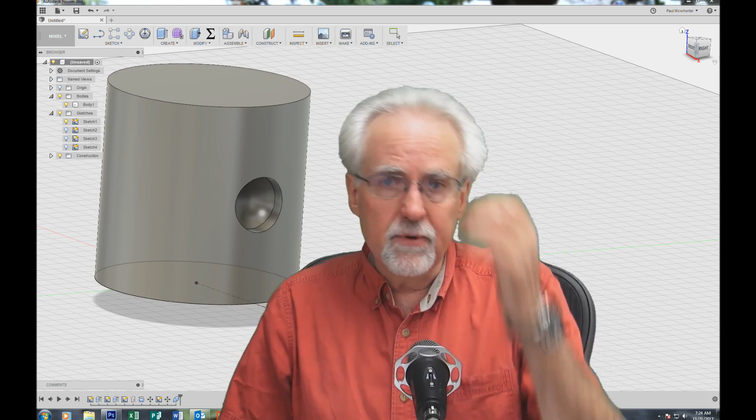We're actually going to have lesson number 13 in this series, and what we're going to look at today is a technique for creating more complicated 3D shapes in Fusion 360, and specifically we're going to be learning how to create a tool.

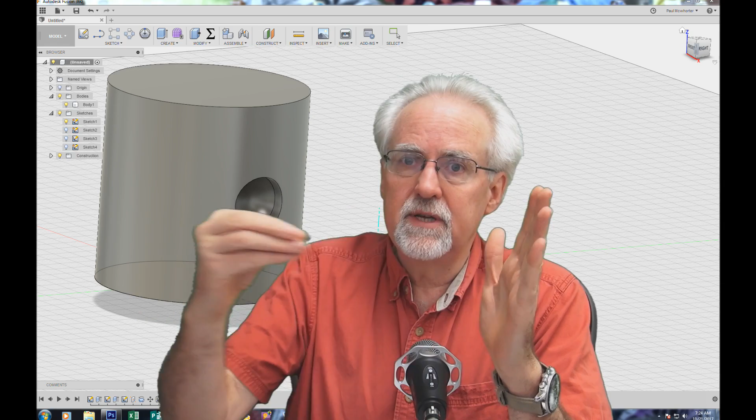A tool is something where you create a mechanical object in Fusion 360 that you use to cut or intersect another three-dimensional object. Now what I need you to do is pour yourself a nice strong cup of coffee, fire up Fusion 360, and get ready to learn some cool stuff.

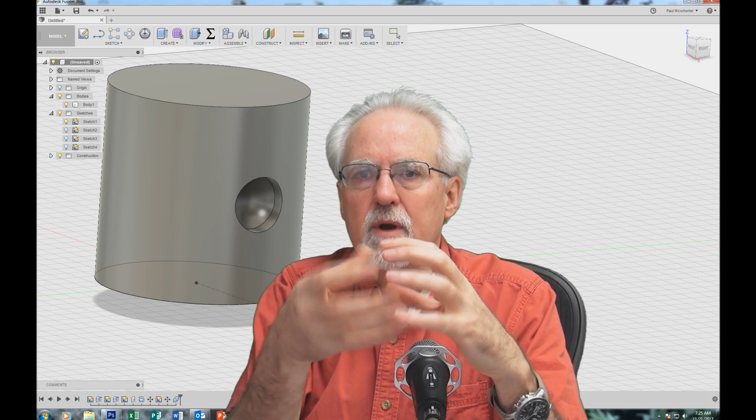Specifically what I am trying to create here is I'm working on a little project where I would like to sort a bag of M&Ms, and so I want to pour a bag of M&Ms in, and then I want to mechanically be able to sort them by color. I'll have a color sensor and then a stepper motor, and it'll all be controlled by an Arduino.

Now the electronics in the sensor part and the stepper motor are pretty straightforward, but the challenge is to be able to go out and get an individual M&M at a time. So what I want is I want to create this mechanical piston, and this piston will be in a cylinder and it will turn, and as it goes by I need an M&M to drop in this hole.

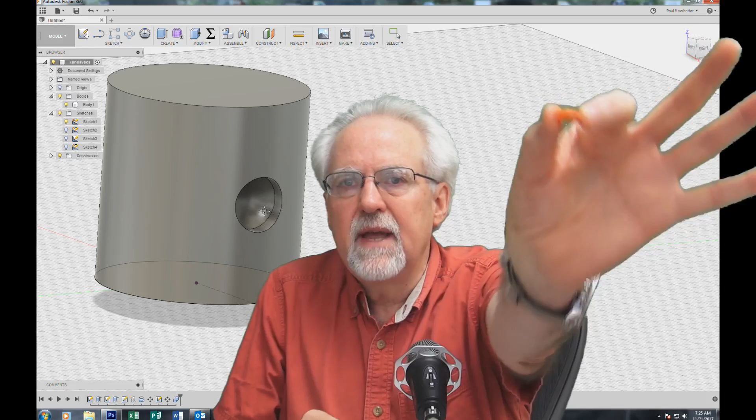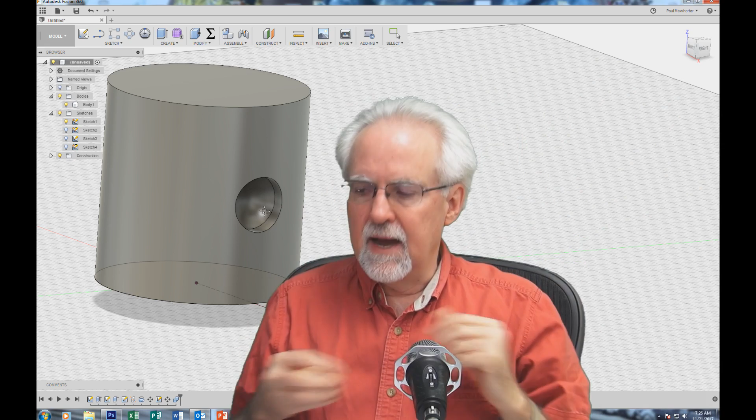But the challenge is you need the M&M to drop in and lay nicely in the hole. And if the bottom of the hole is flat, there's going to be a tendency for M&Ms to fall in this way and then not go over. And then as it spins around, it's going to chop the M&M in half. So I need a nice, smooth, rounded bottom. I need the bottom of the hole shaped like the bottom of an M&M.

So this is going to be a little bit more advanced in the skill set that we're going to develop today, and what we're going to do is we will create a tool and use that tool to cut the hole in the cylinder.

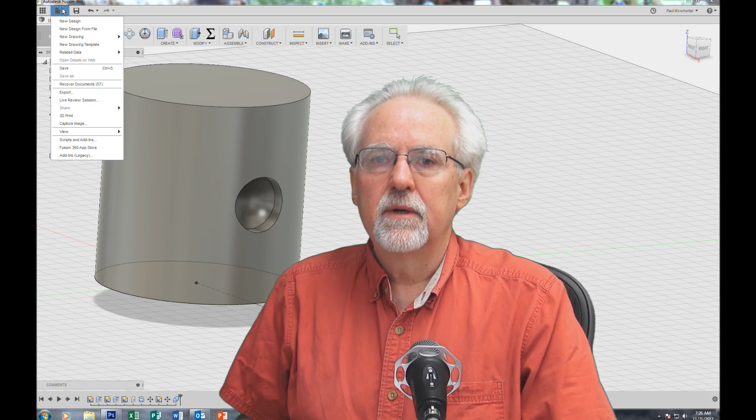So let's go ahead and let's create a new design. Okay, fire up 360. I will get out of your way, have a sip of most excellent coffee, and we will begin drawing.

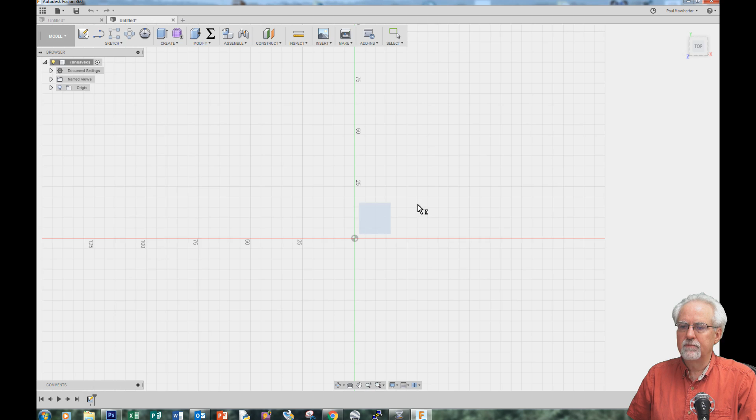Yes, we will. We'll begin with a sketch, and we will sketch a circle, center diameter circle. We're going to sketch in the XY plane, so we click here. We're already in circle mode. Hover over the origin, let it snap to the origin, click once, pull, click again. Now there's my circle. Type D for dimension, then click on the circle, come out, and how big do I want that? I want that 50 millimeters.

I want the piston 50 millimeters in diameter. Type 50, enter. Boom. Okay, I also am going to want to create the tool, so I'm going to always be deliberate about where I put things. So I'm going to make a line, L for line, click on the origin, come out along the x-axis, click again, escape to get out of line tool, D for dimension, click, drag, click. Okay, I want that 75 millimeters away.

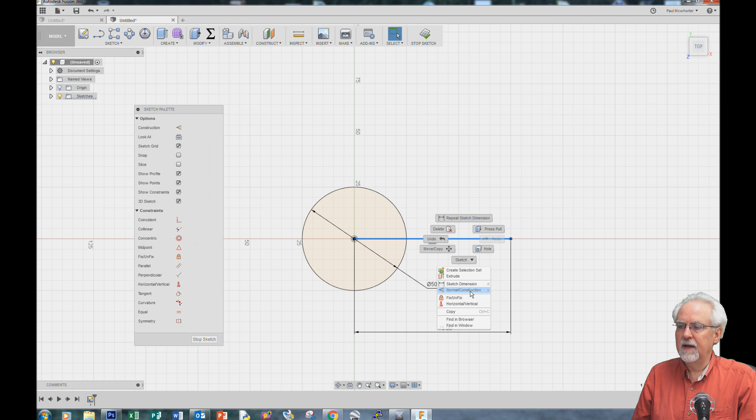Escape to get out of the dimension tool, right mouse click on the line, and let's make it a normal construction line. Now I want a circle, click on that construction point, click, drag, click, and then D for dimension, click on the circle and come down. Okay, now how big do I want that circle? Well, that is going to be my cutting tool, and I want the hole to be the size of an M&M.

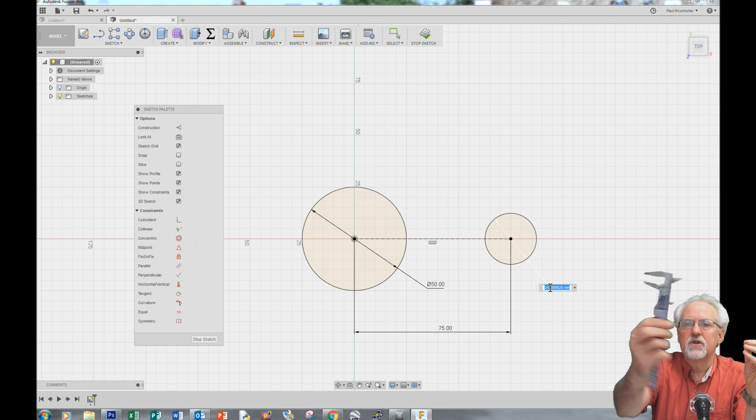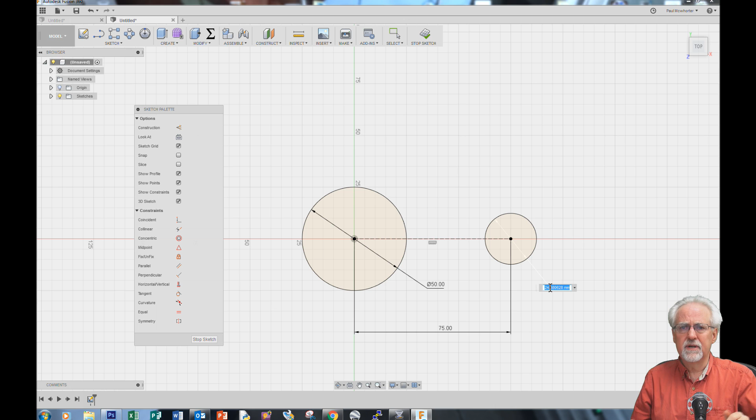So I get out my trusty calipers and I measure the M&M. Okay, the M&M looks to be about 13 millimeters across. But now understand, some M&Ms are going to be a little bigger, some are going to be a little bit smaller, and also you want just a little bit of margin. So if I take into account the variation in size of the M&Ms, plus I leave a little bit of margin, intuition tells me I should make this about 14 millimeters. Now actually it's a little bit more than intuition, because I have gone in and I have measured all of the M&Ms in several bags, and I've determined that 14 millimeters should pretty much accommodate all of them with a little bit of room to spare. So I'm going to make the hole 14. Boom. Okay.

Now I'm going to stop the sketch and click on the big circle. I'm going to hit E for extrude, and then how far do I want to extrude it? I want it 50 millimeters high. Boom. So there's my piston that is going to be spinning around picking up the M&Ms.

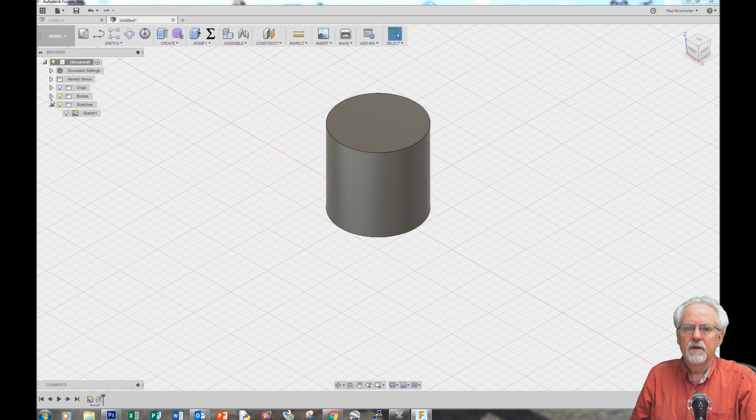Now I need to come over here. Sometimes it turns your sketches off when you extrude, so I want to turn that sketch back on. You go to the little light bulb and click on it. Now I want to click here, extrude. I'm going to make this half as big, so 25 tall. Boom. Okay, so this is going to be my cutting tool.

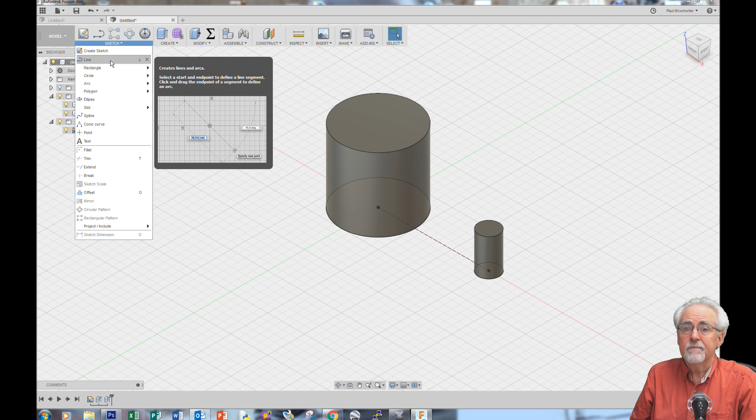Now I need to do some more work on the cutting tool, and I need to put the position where I want the bottom of the hole in the cylinder. So to do that, I need to go back to sketch mode. I'm going to create a sketch and create a line. I want to go in the XZ plane, that's the red-blue plane, so I'll come like that. And I'm going to turn that body off so I can do some drawing.

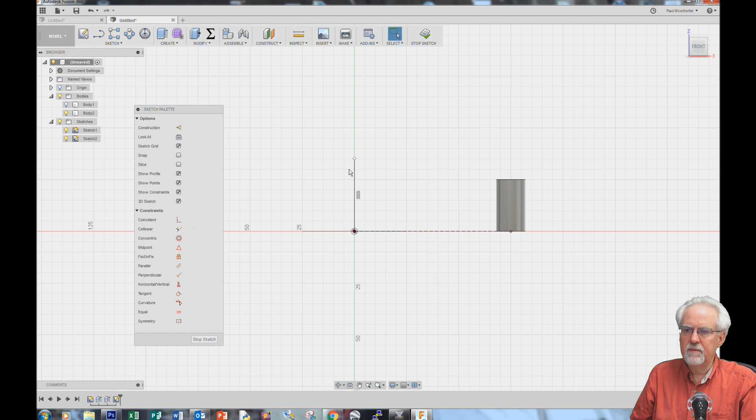Now, where do I want the bottom of the hole? I want it to be halfway up the cylinder, so I need to give myself a point to design to. I'm going to click on the origin, come up, click again, escape, D for dimension, come over. So if it's 50 high on the cylinder, and I want the bottom of the hole to be halfway up, that would be 25.

No, I'm not doing parametric design this time. It's just for the videos - in real life I always do parametric design. If you don't know what I'm talking about, go back and look at my parametric design video. But if I do parametric design during the training, it slows the training down, so I can go faster if I don't do it here.

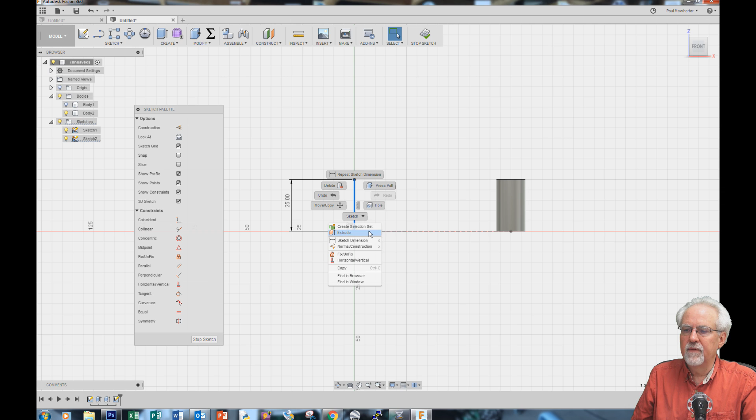Okay, now come over, right mouse click, escape to get out of the dimension tool. Right mouse click on that, make it a normal construction line. Type L to get back to line. Now I want to come out, click again, escape, right mouse click, normal construction line, and then dimension it with D for dimension. Okay, now what do I want to dimension this?

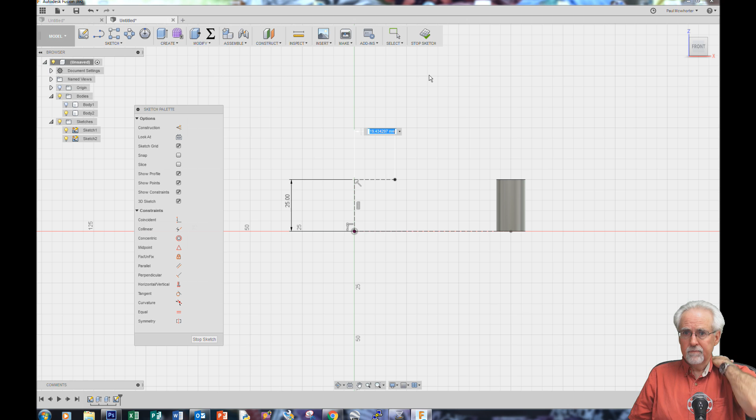This point here is going to be the bottom of the hole. Where should the bottom of the hole be? Well, I want the hole to be the thickness of an M&M. So what is the thickness of an M&M?

I get my trusty calipers, and it looks like about 7 millimeters. But some are a little bit thicker, and you want a little bit of margin. Doing all the testing, I've determined that 8 millimeters will accommodate everything with a little room to spare. So I'll make it 8.

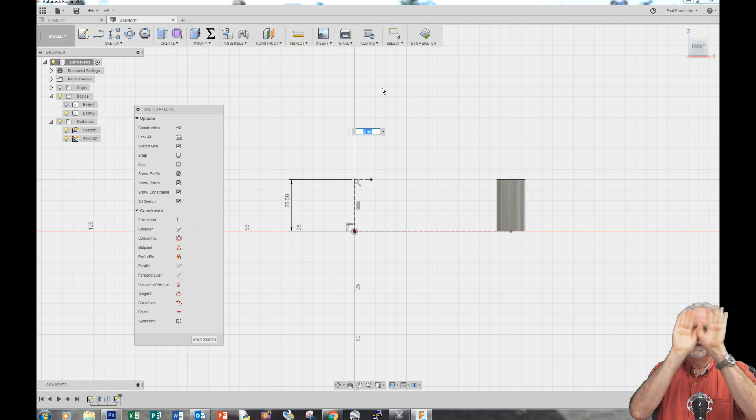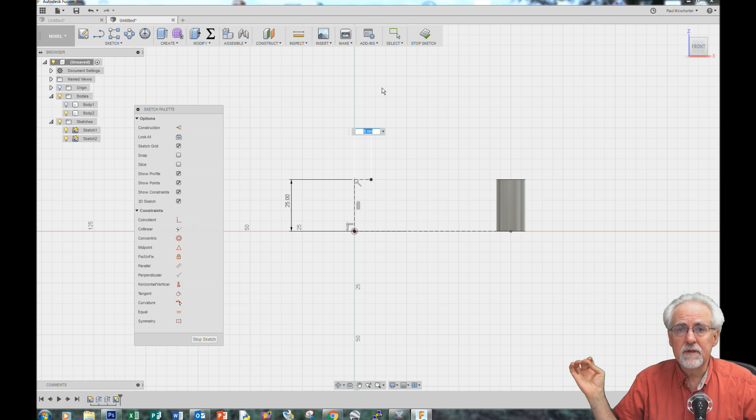Oops, that should be 8 deep. Okay, so that was not what I meant to type in there. I want the hole 8 from the edge of the cylinder. Here's the cylinder, and I want the bottom of the hole 8 in. So if the cylinder is 50 in diameter, it is 25 in radius, so from the center to the edge is 25, and then I want to come in 8 from that, so the distance from the center would be 17 - 25 minus 8 is 17. 17, enter. Okay, so that is where I want to put the bottom of the hole. Does that make sense? Hope it does.

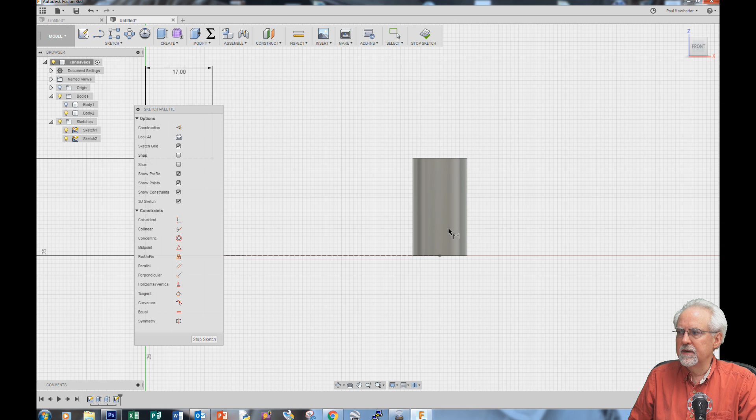Okay, now I need to come over here and do a little work to create this cutting tool, because if I use this cylinder here as a cutting tool... let me get the phone away from the microphone. Sorry if it was making a little bit of a beeping noise there, a little crackly noise.

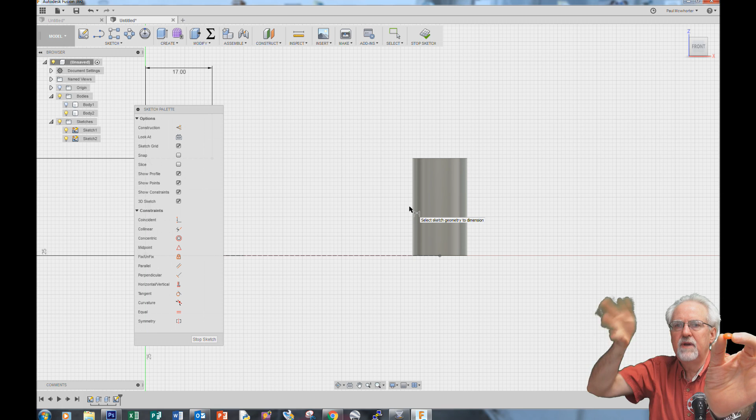So I need to make the top of this cutting tool shaped like an M&M. An M&M is not a hemisphere, so you can't just put half of a circle. You want sort of an arc.

The way I'm going to do that is I'm going to give myself a construction line to begin with. So L for line, hover over and snap to your construction point there that you put earlier. Click once, come up, click again, escape to get out of the tool. Right mouse click, normal construction line, okay, and now D for dimension.

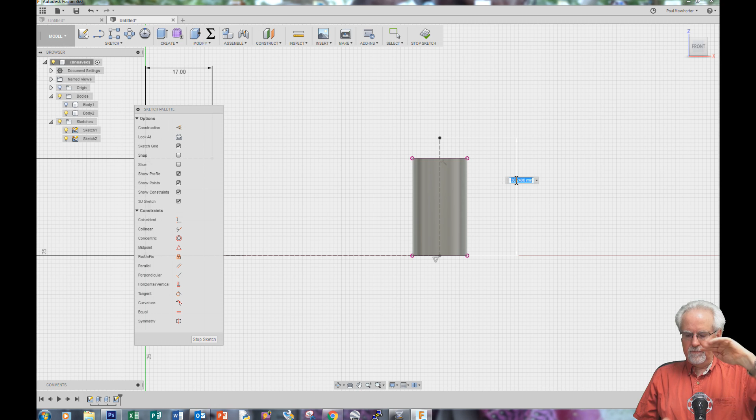What should this dimension be? Well, the cylinder is 25, and then I want to add to it half of the thickness of the M&M. You see the M&M, that curved part is just half the thickness. So we said that the M&M should be 8 thick, so half of that would be 4. 25 plus 4 is 29.

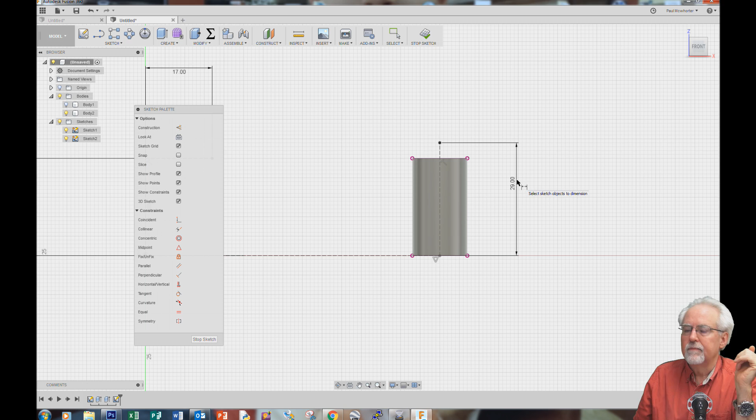Okay, so I want to now create an arc like that. So what I will do is I will get a circle, but the type of circle that I want this time, I should be over here, circle. I want a 3-point circle.

Now you see how I already have a point here on the edge, so I click on that edge. I come over to the other edge and click, but now I want to click there at that construction point. Now look at that, you see I've got a shape like half of an M&M.

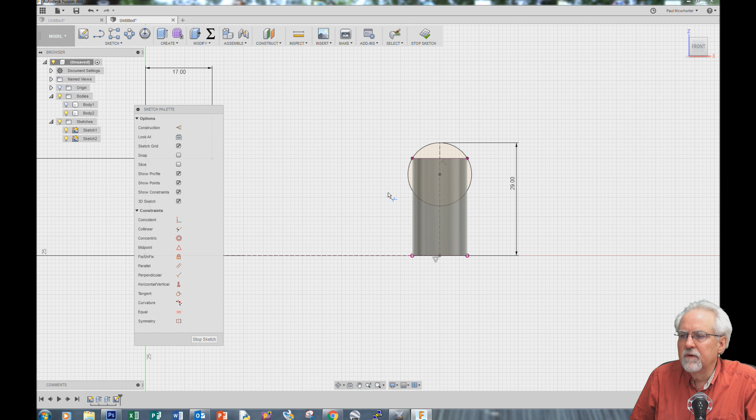Now I want to trim off what I am not using. So I'm going to come over here. I'm going to trim this, and I'm going to trim this, okay, and I'm going to trim that.

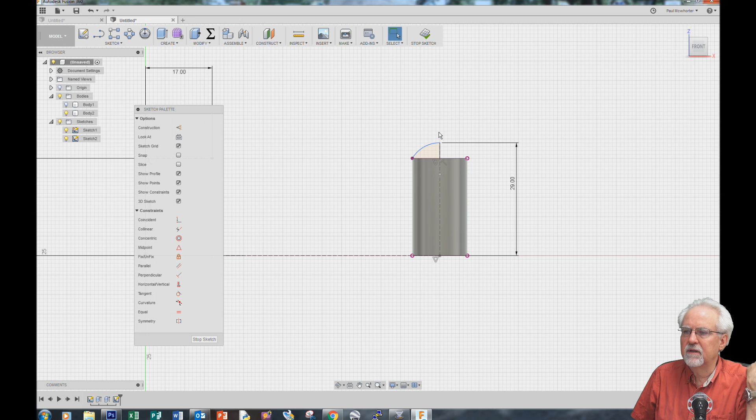Now the problem is this is a construction line here, so I don't actually have a closed surface, so I need to just close that off by getting L for line, come here, click, come here, click, and now I'm going to escape to get out of the line tool. You see now I have a closed shape, so I want to revolve that around.

You can't revolve around a construction line, so I need to create, under construct, I need to create an axis. And I want to go an axis between 2 points because I've got to give an axis there to rotate that around. So axis through 2 points.

The first point is this center point in the bottom. The next point is this one up here. And then if I click OK, now I have a new blue line that's an axis.

Now what I want to do is I want to create a revolve. What is it that I want to revolve? I want to revolve this little shape here. So I click on it.

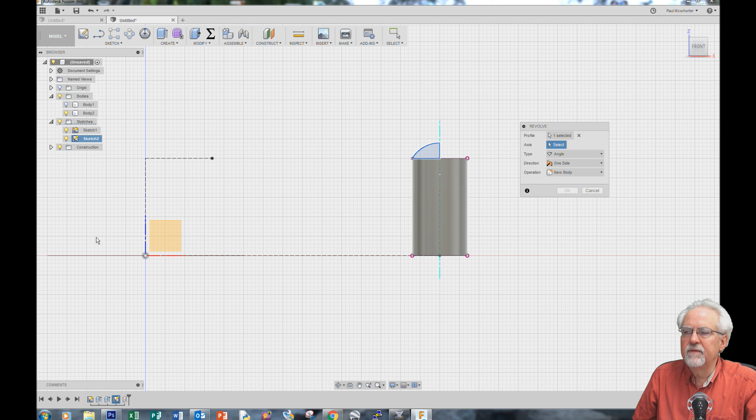Now I need to come over here and select, let me move this closer, select axis. So now I'm going to select the axis that I'm going to rotate around. And it's not over here any of this nonsense, it's this blue axis that I created. So I want to rotate about that.

I want to go 360 degrees, one-sided, and I want to join it because I want this to join to the body down underneath it. So I say join. Okay, boom, look at that. I have something that looks like a tool that would cut a hole in that cylinder.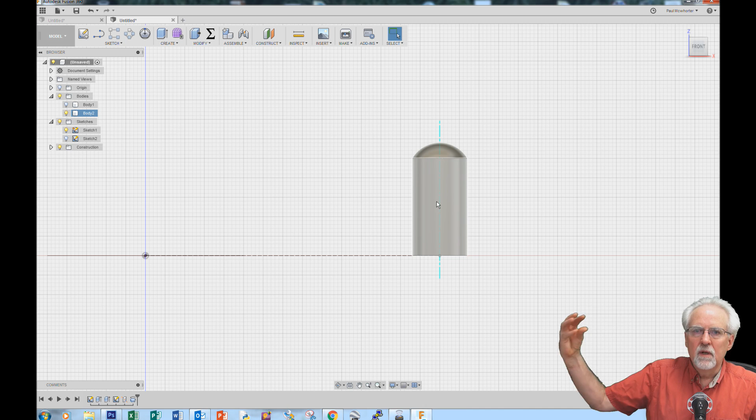I'm going to turn my other cylinder back on over here, and I'm going to turn this other sketch on so I can kind of see things. Now what I want to do is I want to put this over here.

Okay, and I am not going to be very brave. I'm going to do that in 2 steps. So I'm going to right mouse click and I'm going to say move copy.

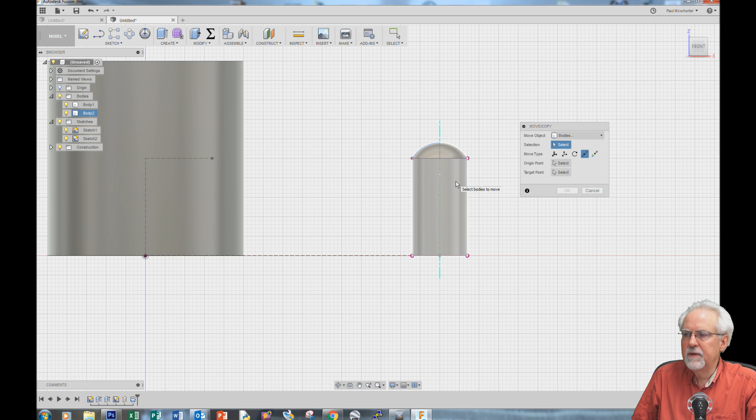What do I want to move copy? I want to move copy this. What's going on? I want to move copy this body. Okay, so I've selected the body. It's a body, I've selected it, and I want to do a free move.

So I click here under free move, and then I got to set the pivot point. I don't want to pivot around this corner, so I've got to click select the pivot point.

I get a check mark, and then I want to put it right in the middle. Now I'm going to rotate around that middle point, and the angle I'm going to Y angle rotate minus 90. I don't know why they call that the negative direction. I'm a math teacher, I call that the positive direction, but counterclockwise here is going to be negative. Oh, I'm sorry, I've got to check the checkbox here under set pivot.

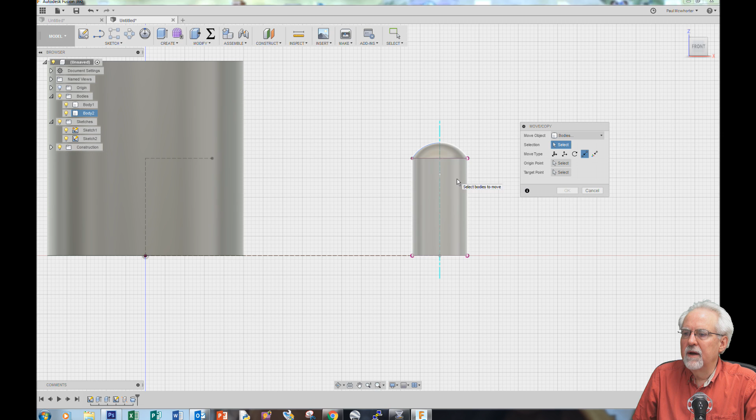Let me just do this again to be clear. Right mouse click, move copy. I want that body. I want to do a free move. Now I have to click on set pivot, put the pivot point in the middle, and click the check mark. Now you come down to Y angle minus 90. Boom! Look at that, there it is.

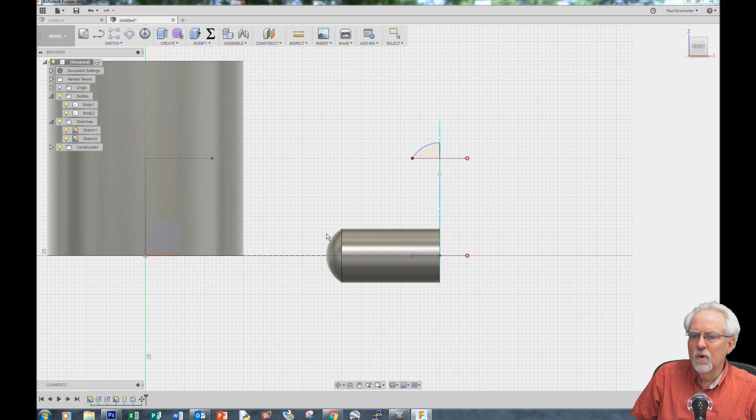Now the problem is I want to move this point right here to that point. And the problem is right now there is not a point there, so I need to project this or intersect this with that plane so it'll give me a point at that intersection. So you come up to sketch and I want to say project include, and I want an intersection. And what do I want to intersect? I want to intersect this plane with this body, and then I say okay.

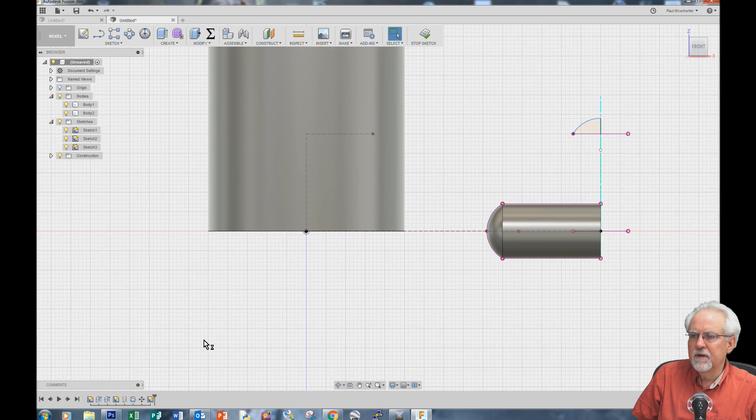So I intersected the X, what is that? I've lost track of it. I think it's the XZ plane. I clicked on it with this body, and now that gives me this magical point here. Now I'm going to stop sketch, and I think I'm going to turn this first body off so I can see things more clearly.

Now I want to move copy. I want to move point to point. The point I want to move is this one. Let me make sure I can get that one right there. Select the point, that one right there. And then the second point is right here, and look at that, it's showing me that line.

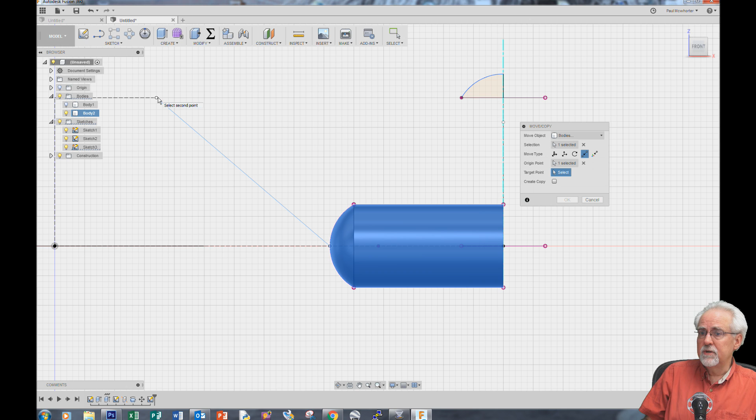It's saying, buddy, this is what I'm going to do. Is that what you want? Yep, that's what I want. So I click there, and then I say okay. Boom, look at that, I've got that right in the exact position. Let's turn body 1 back on by clicking there. Okay, so now I have this tool inserted in this object.

Now, my friend, this is where the magic happens. You want to come up to modify, and you want to come down to combine. Okay, and what do I want to combine? Did I do that right? I want to create... no, I want to combine.

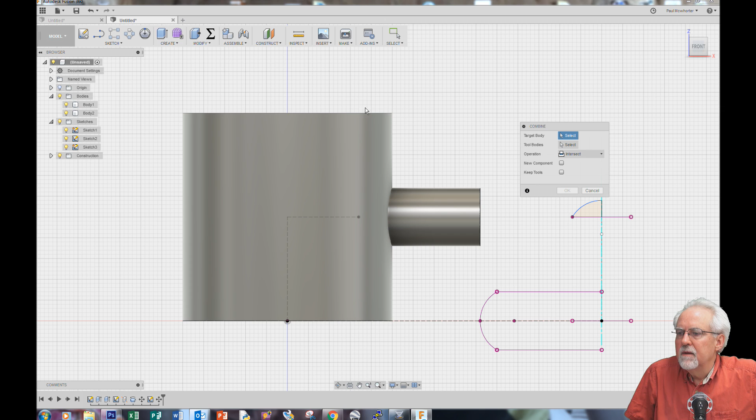I clicked something wrong before. Let's do this again to make sure. You come under modify and you come down to combine. The target body is the body that you want to cut, the body you want to act upon. That's this one. What is your tool? My tool is this.

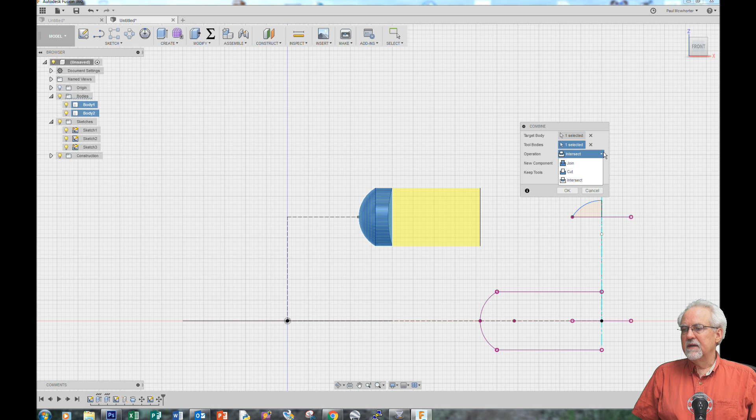If I said intersect, it would get rid of everything except where the two bodies intersected, and then I would end up with this as my new mechanical element. It's actually kind of an interesting shape, a very complicated shape, but this is the shape of the hole, so I don't want to intersect. I could do join, and I would have something that would be the combination of the two elements, but actually what I want to do is cut.

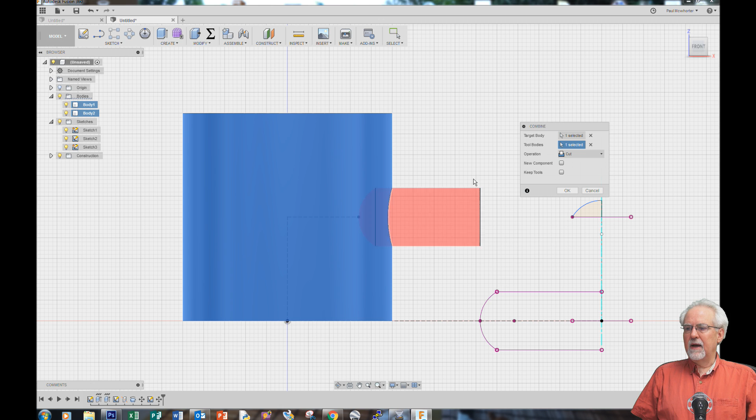And that is going to take the tool and make a tool-shaped hole in the body. You don't want a new component. You don't want to keep the tool because you want the tool to go away when you're done. I guess maybe if you were going to cut multiple holes, you could keep the tool, but I don't want to do that. So I am going to say okay, and then let's look at what happened.

Boom! Look at that, I have an M&M shaped hole cut in this piston. All right, now, as you can imagine, as any good instructor would, before doing this I actually fabricated it. And so you can look at it there, an M&M shaped hole in the bottom of this piston.

Also, what I did was I went ahead and created the cylinder, and that's just a standard hole through it. And the idea is to have a little funnel here. Okay, and then if I put M&Ms up here, if I twist this around, it should just drop them through one at a time. So let's see if that works.

I am woefully short of M&Ms today, but I do have two. All right, and then you see there's a hole there in the bottom, so now let's turn the piston. I just heard it click. It picked one up and it drops it. Click, it picked one up and it drops it.

Okay, so do you see what I can do with this? I can pour, or I can spill M&Ms all over the place. I can pour the M&Ms in here, and then I can turn it around, and it's going to one at a time drop the M&Ms out.

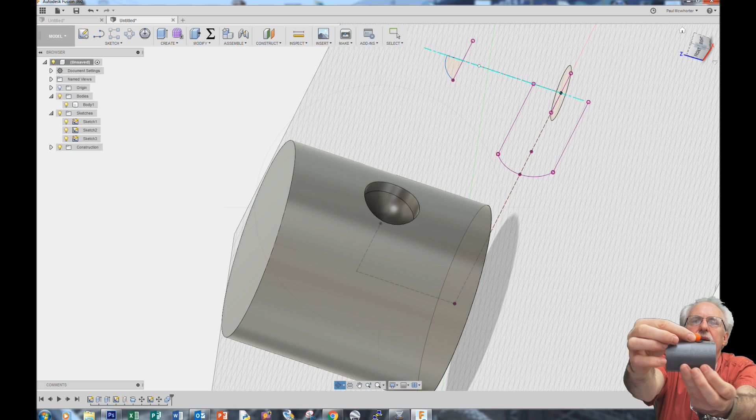So anyway, I thought this was a pretty neat little project, and actually it was needed because as I was trying this with a flat bottom hole, the M&M would go in like this and could end up standing up and not going all the way in. But with this shape, it's like 100% of the time the M&M never stands up - it always just goes down nice and smooth into that perfectly shaped hole.

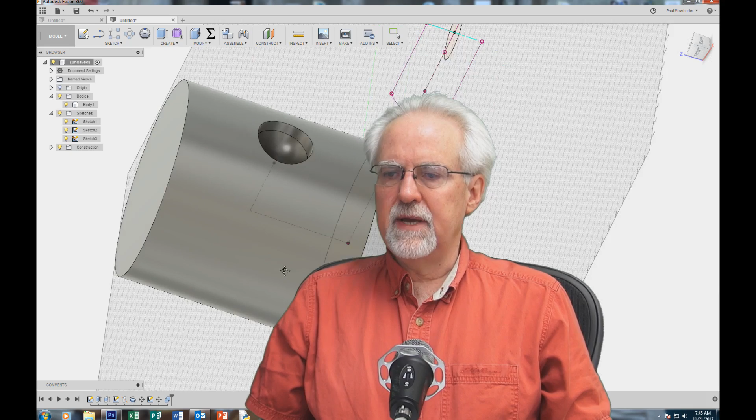What I hope you see is that this lesson isn't really about making an M&M sorter. This lesson is about what to do when you need a more complicated shape, because if you look at this thing, I would not want to go in there and start trying to draw that hole directly. What I want to do is, since I can't think in negative space, I think in positive space. So I design a tool, I think in terms of a tool, and then I make the tool the shape I want, and then I move over and cut with it.

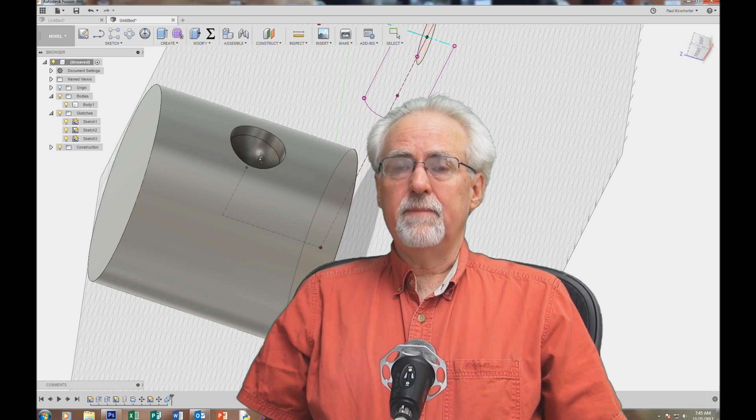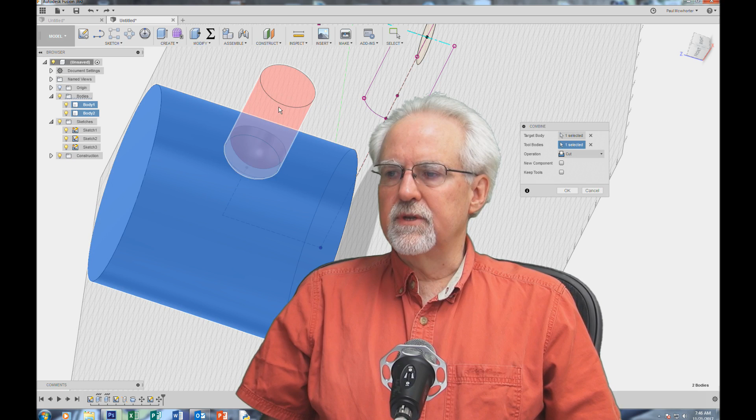Also think about that intersect feature - that was pretty useful too, where you can create a new body that's the intersection of two bodies. Let's just take a quick look at that. I'm going to do a modify, then a combine. This is the body, this is the tool, and I want to intersect them. Okay, look at what a sophisticated shape this is that we created.

Do you see how on this side it's the profile of the cylinder? It's not flat, and then this is the profile of the M&M, so you have this very elegant intersection between two cylinders at 90 degrees. That would be very hard to do without using these techniques.

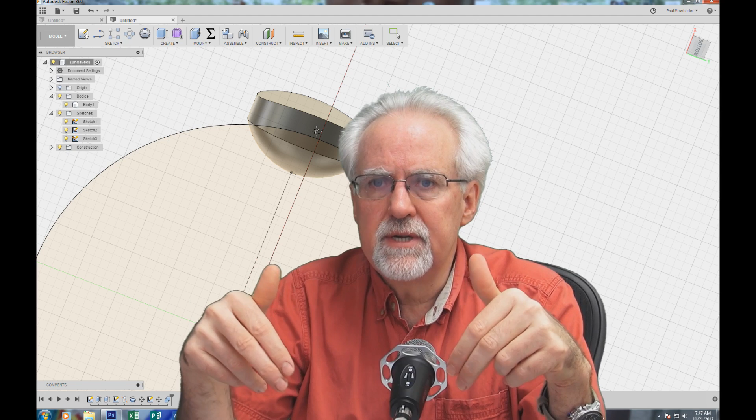Wow, that's good coffee.